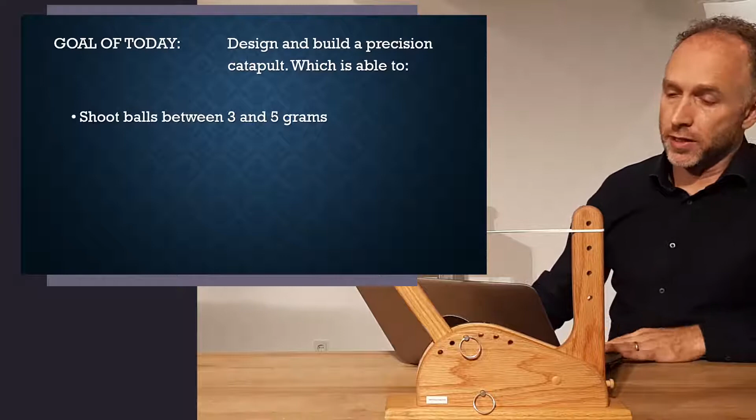This problem occurs a lot of times in a lot of factories and a lot of different technical systems. And we will use a catapult to try to get a grasp of that problem. We will not use a wooden catapult like this, but we will realize our own catapult today. So our goal of today is to design and build a precision catapult which is able to shoot balls between 3 and 5 grams, so the products that we realized yesterday, over a distance between 1 meter and 2.5 meters.

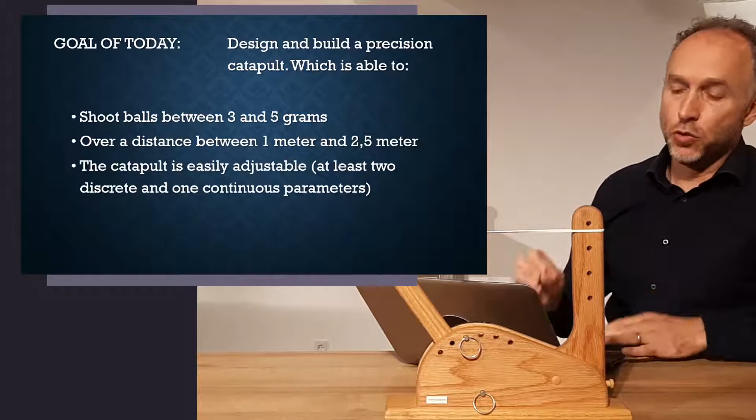The catapult is easily adjustable. We have at least 2 discrete and 1 continuous parameters. For our teaching example here, we have a discrete parameter like this, where the rubber band is fixed. Another one is where the cup is fixed. And we have here the continuous parameter, which is the angle at which the arm is pulled back.

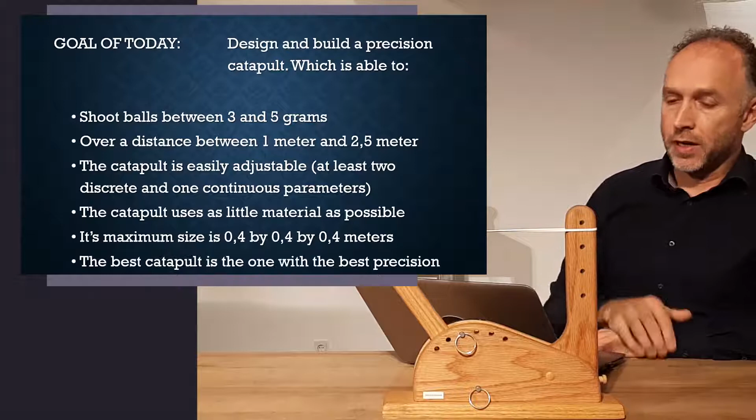The catapult that we will build today uses as little material as possible. We need to divide all our materials over the teams evenly. The maximum size is 0.4 by 0.4 by 0.4 meters. And the best catapult today is the one that achieves the best precision. Okay?

So when we want to realize a construction like this, we first need to think about the degrees of freedom. We want to move the ball along a desired trajectory, and that means that we fix its degrees of freedom. How many degrees of freedom do we have? We can explain that by using just a simple box. So we have 3 translations for this box: 1 in this direction, 1 in this direction, and 1 in this direction. And then we also have 3 rotations: 1, 2, and 3. So every time that you mount or fix something, you always have to think about these 6 degrees of freedom.

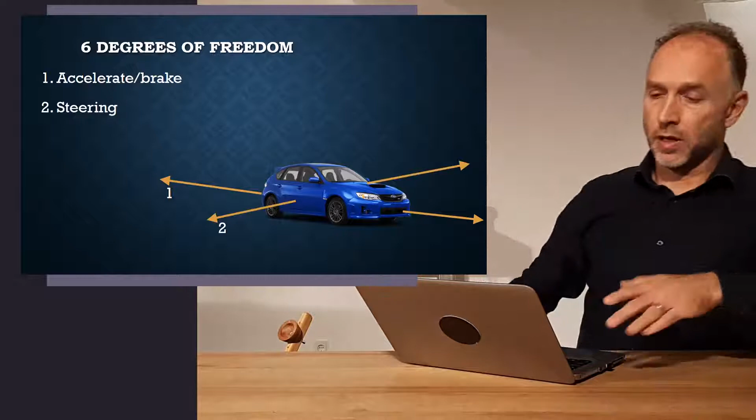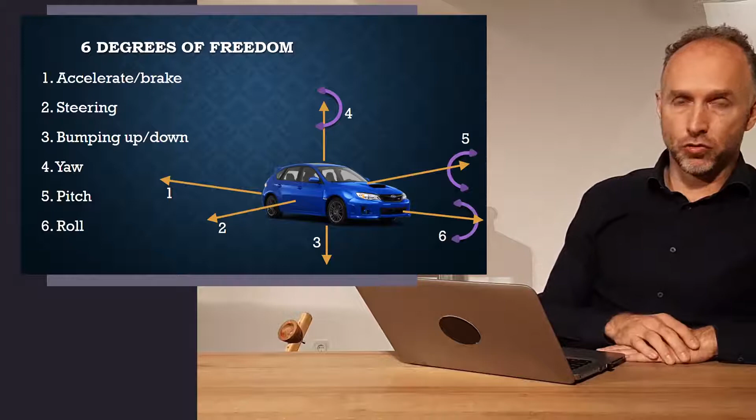For a car it looks like this. We have the transversal movement, acceleration and braking. We have steering. We have bumping up and down. And then we have the 3 rotations: yaw, pitch, and roll. So for our catapult.

We want to only use our creativity when we have found and stolen the best ideas out there. So what we always do in problems like this is start with benchmarking, stealing other people's best ideas. The first catapult that we can steal ideas from I just showed you, the teaching example, and then we have bought 4 different types of catapults. And for your design, you can steal the best ideas of these catapults.

So how do we want to analyze these catapults? First we use our function model. So we make a function model of our catapult. What are the different functions? And then we look at how these functions are fulfilled with our benchmark products, and then we have an idea of what the best catapult could look like. Okay?

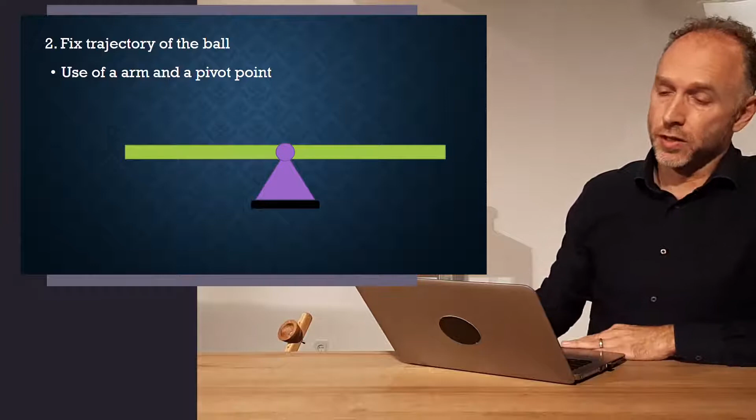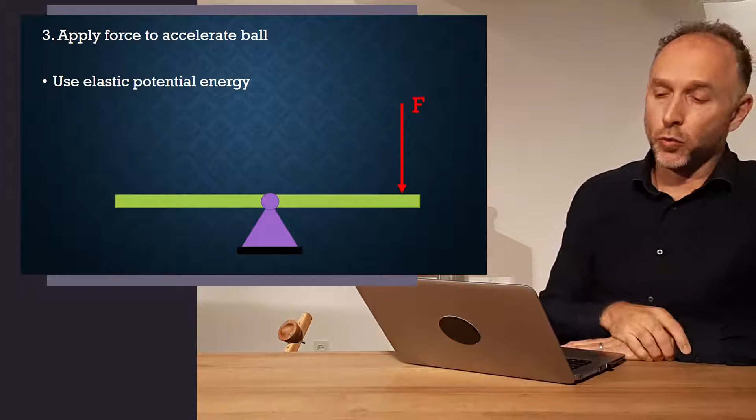Third function, when we have fixed the ball to move along a trajectory, then we need to apply force to accelerate it along that trajectory. And with a catapult, we use elastic potential energy to do it. That's our third function. Fourth function is we need to release the ball. And we do this by deceleration of the arm.

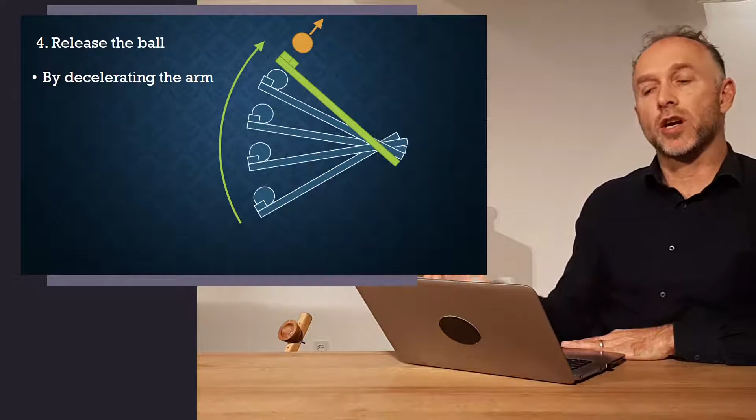Fourth function. Fifth function, we have a lot of energy now in our arm and we need to dampen that. Or else our catapult will destroy itself or it will deform and shoot every time in a different way. So we need to absorb our kinetic energy by some dampening material.

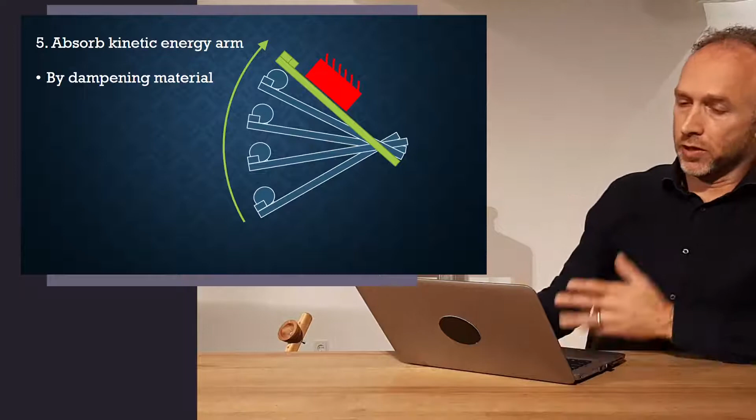That's the fifth function. We arrive at our last function, and that is that we need some framework to fix the position of the catapult. And we want to do it by not over-determining our catapult, but we want to fix every degree of freedom exactly one time.

I want you to think about a table on 4 legs. If not all legs are exactly the same length, it can still move. And a table on 3 legs, that's the stable solution. So that's not over-determined, but exactly right. And we want to have as little play as possible in our frame. So that's the 6th function.

The trajectory of the ball is a hinge with 2 wooden holes. The wooden holes are quite close to each other, and we have a heavy wooden arm. The force used to accelerate the ball is a rubber band. To release the ball, the heavy wooden arm is stopped by a metal pin.

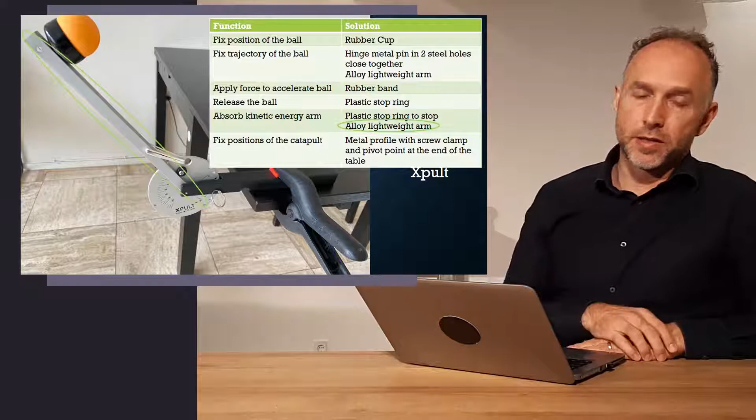And you have to use something like that with the other materials that we have. If you would try to make a more heavy arm, you just destroy our materials. So please use the same type of lightweight arm as this Xpult uses.

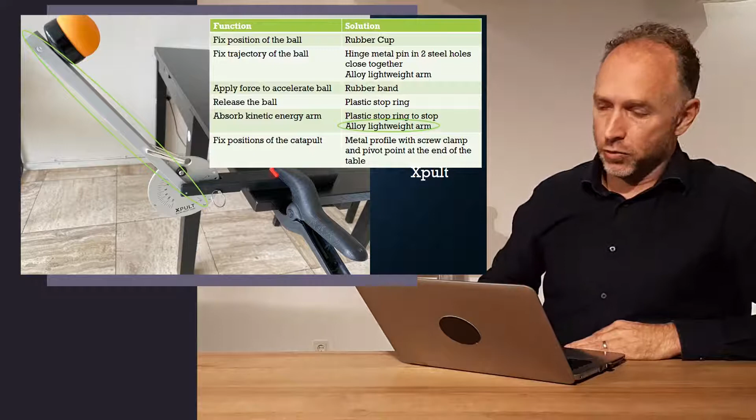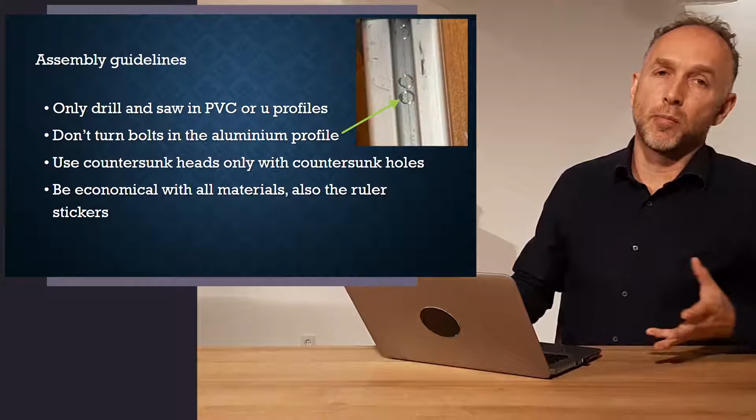And then I want to show you two design examples that you might find useful. First of all, how to attach the lightweight U-profiles that you will use for your catapult arms. You can attach them to the Bosch profiles as shown in the picture. So you just use two corner elements and 4 sets of nuts and bolts.

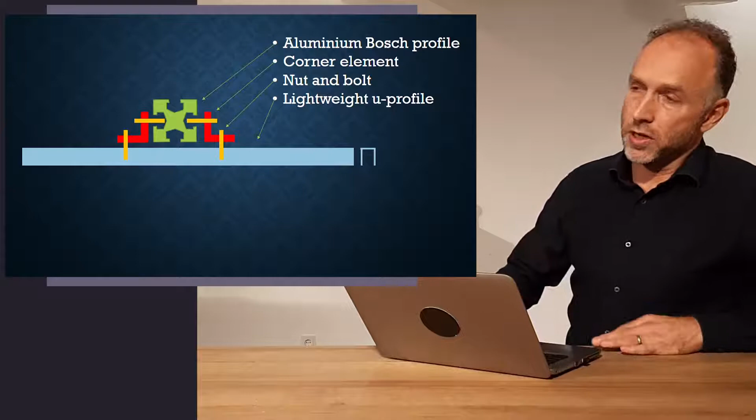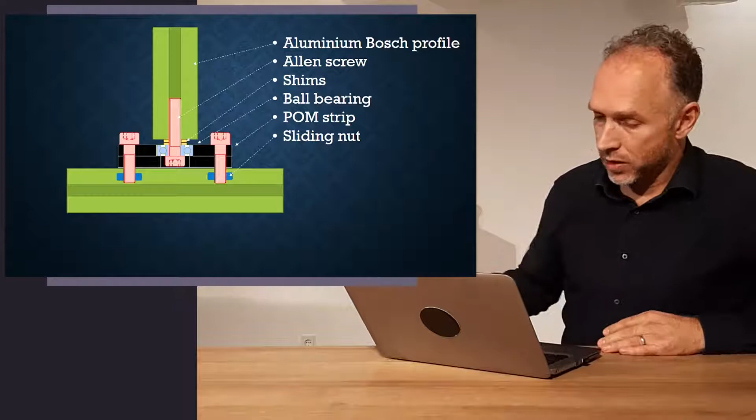Next example, how to use the roller bearings. What you see here is a Bosch profile, Allen screws, 3 sets, 2 shims, the ball bearing, and the POM strips, black POM strips that you can find, and 2 sets of sliding nuts. And then you can realize something like this. So the ball bearing is here.

So what you fixate with this is 2 translations, this one and this one. And what you also fix is the translation in this direction, but not in that direction. So you might want to use the same thing as here on the other side to also fix that. Then you also fixated this rotation and this rotation, but not this. And that might be exactly what you want to have for the rotation of your arm.

Okay, that's it. Have fun today, and at the end of the day we will have a contest which catapult of you is able to shoot with the best precision. So we will shoot like 10 balls and we will see which catapult is the one for which those balls are as close together as possible.